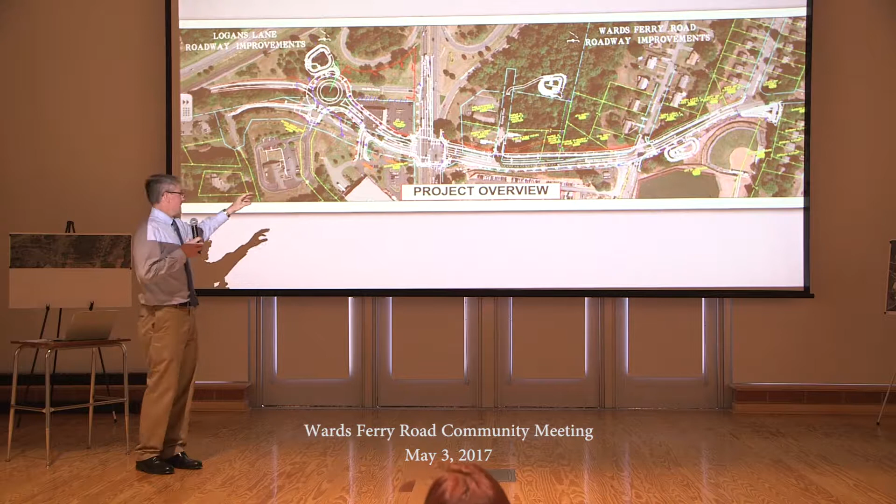Work will be going on both on the Wards Ferry Road side of Timberlake and the Logan's Lane ramp part of the project, basically at the same time throughout that 18 months, to make that as short a window as possible.

But coming off 501, the expressway, to get onto Timberlake, you will encounter this roundabout, the traffic circle, which I know there's been a lot of questions about, and we're happy to answer any questions about how traffic will flow. There's several of these in the city, and more people are getting accustomed to them, as well as there being a learning curve as traffic learns to navigate that circle.

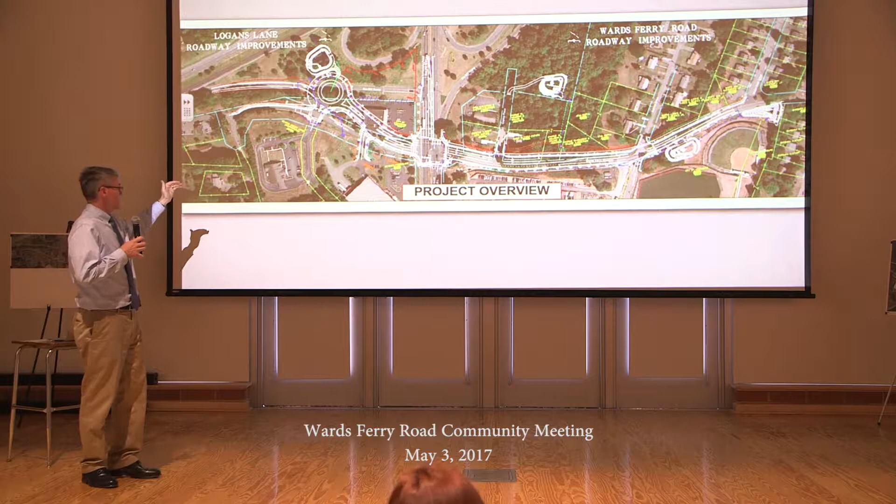You'll be exiting 501, going through the traffic circle to come up to the intersection. The main point of the project is to align that off-ramp in Logan's Lane with Wards Ferry Road. We'll be removing the existing light at the current off-ramp, so you'll have one fewer traffic signal in that corridor.

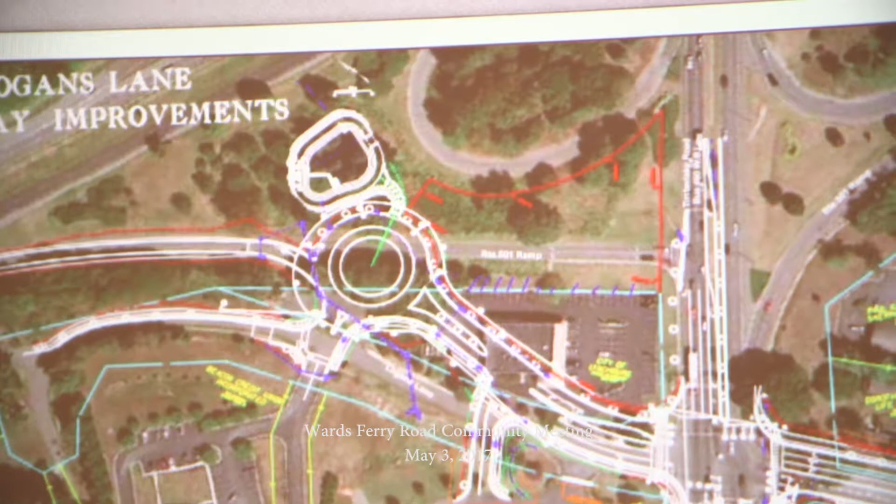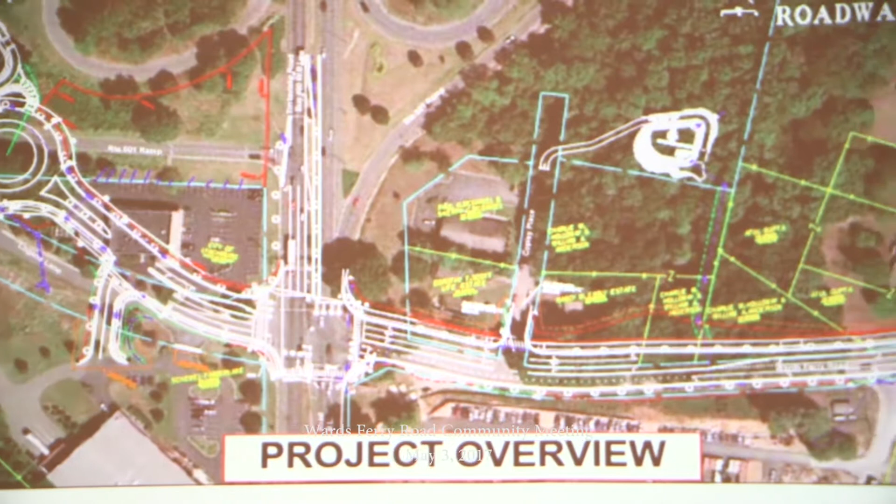Perhaps best of all, on Wards Ferry Road, there'll be dedicated through lanes and dedicated turn lanes, both right and left, into each of the side roads, whether you're talking about Adams or School Drive. The good news is you should never stop behind a turning vehicle again once the project's finished.

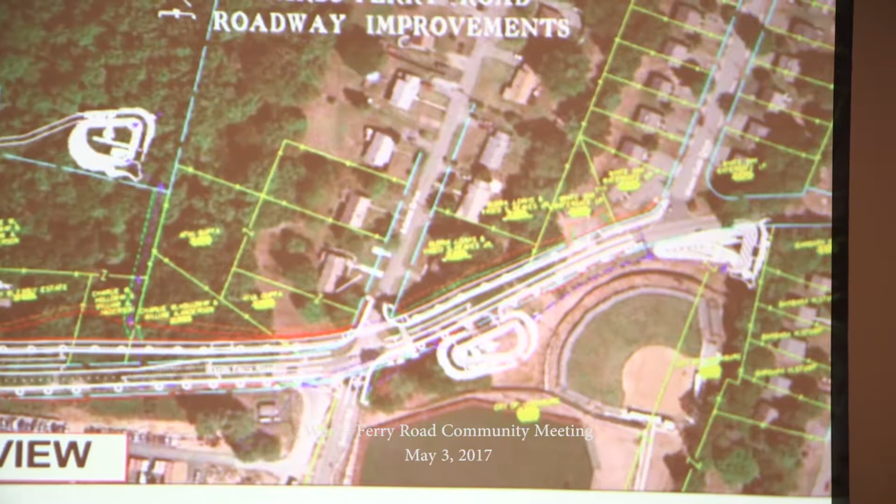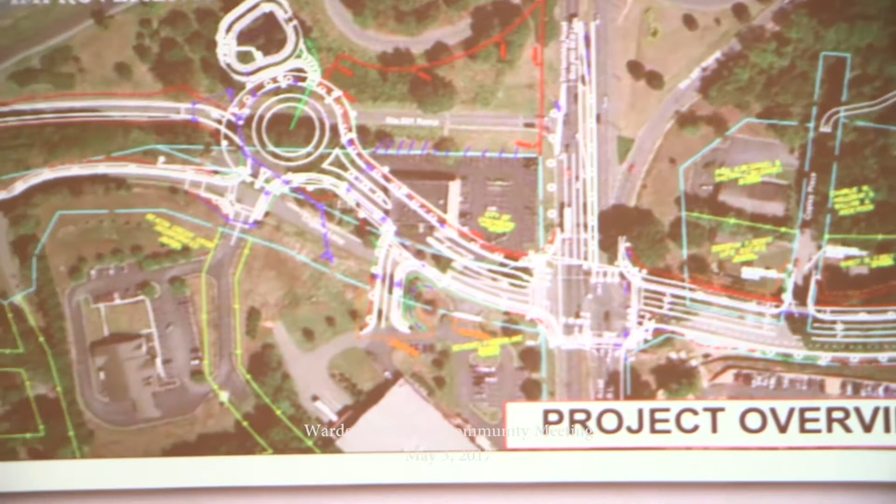With that, I want to turn it over to Brent to talk a little bit about how we're going to get there.

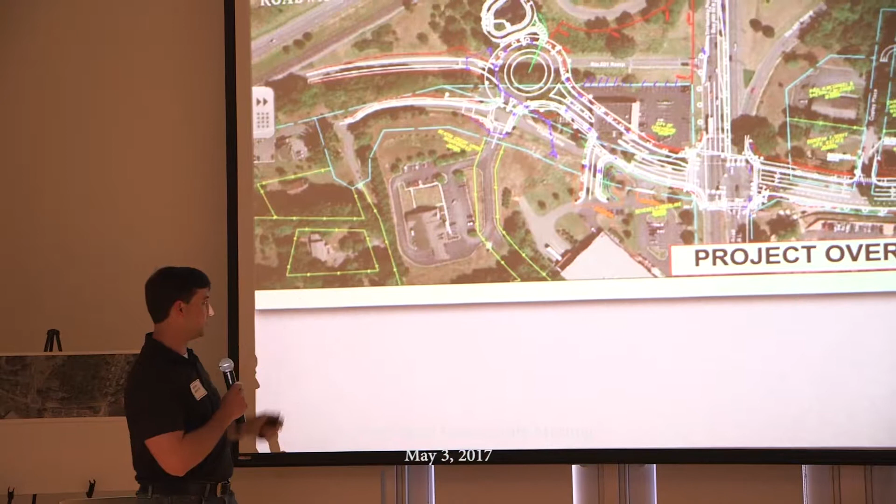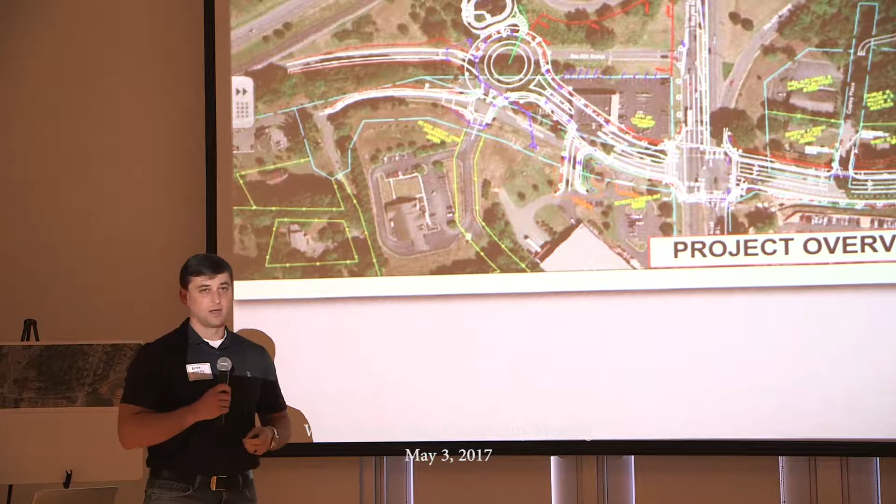Like Brian said, my name is Brent Worley, and I work with Counts and Dobyns, and I'll be the project manager on this job. I'd just like to repeat what Brian said: the whole purpose of this project, if you don't already know, is to construct a roundabout coming off of the ramp into Logan's Lane and intersecting at Timberlake, and then adding some additional lanes off of Wards Ferry Road. This whole thing is going to help alleviate all of the traffic congestion that we have in this area now. I'm not going to take up too much of your time, but we do have some slides prepared to go through the overview of the project and give you a feel of what kind of impacts you'll experience, along with the time frame and phasing.

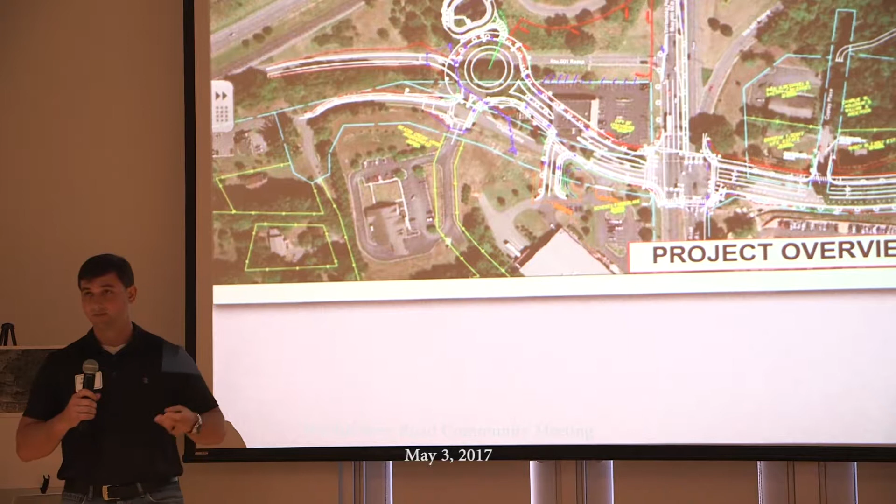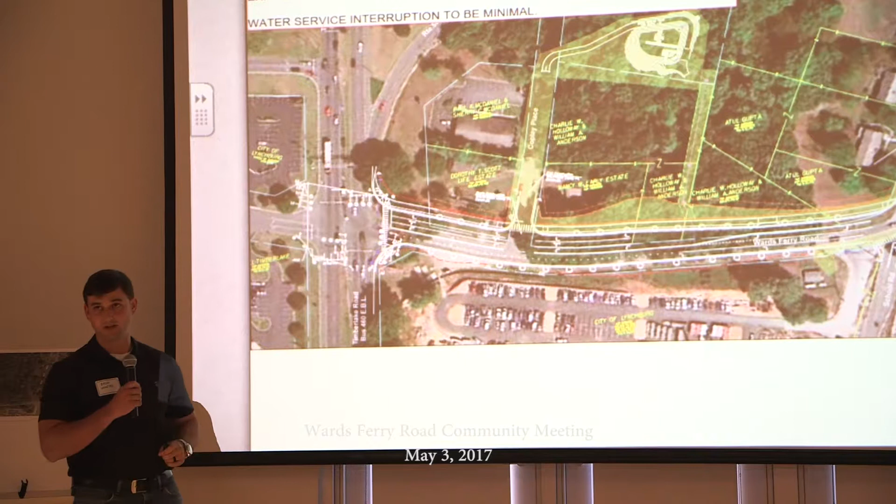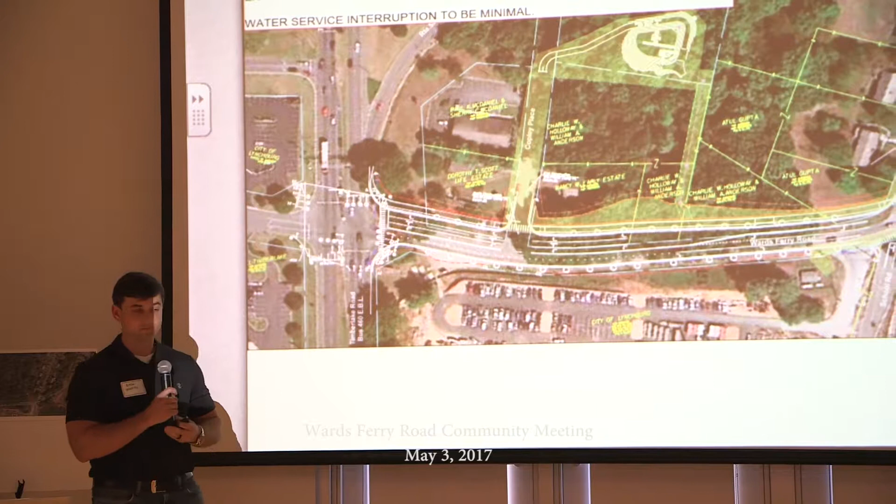The first thing I'd like to do is orient everyone to the slide. This is the Wards Ferry Road section of the project, and as we go through these, pay close attention to the highlighted portions in yellow, because these will be the affected work areas. For example, you'll see that there'll be some clearing along Wards Ferry Road.

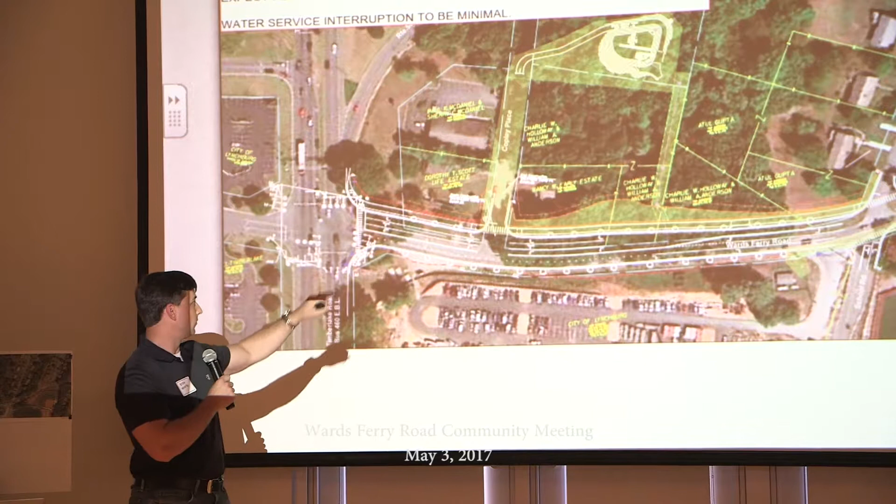Along with that, there'll be 3 sediment ponds that need to go in, 1 at the back of Copley and 2 at the ball fields, and then a water line installation at the base of this pond, all the way up to the entrance to Heritage High School. During this water line installation, you can expect to see flaggers and one-way traffic. This portion of the project will take place from the spring of 2017 to the summer of 2017.

Once we complete that, we'll move into the northbound section of Wards Ferry Road. The activities occurring in this section are demolition and rough grading, installation of storm drainage, curb and gutter, stone placement, and base asphalt mix.

As far as traffic impacts, expect a one-way lane of traffic with flaggers, basically from Watergate Drive down to somewhere right above Adams Drive. It's just a pinch point on the project, but we're going to try to maintain two-way traffic as much as we can. Two-way traffic benefits us just as much as the public, so we're going to do everything we can to maintain it.

This portion of the project is slated to start spring 2017 or summer 2017, and run to about the spring of 2018.

Once we complete that portion of Wards Ferry Road, we're going to do a traffic switch and then start constructing the southbound portion of the lane.

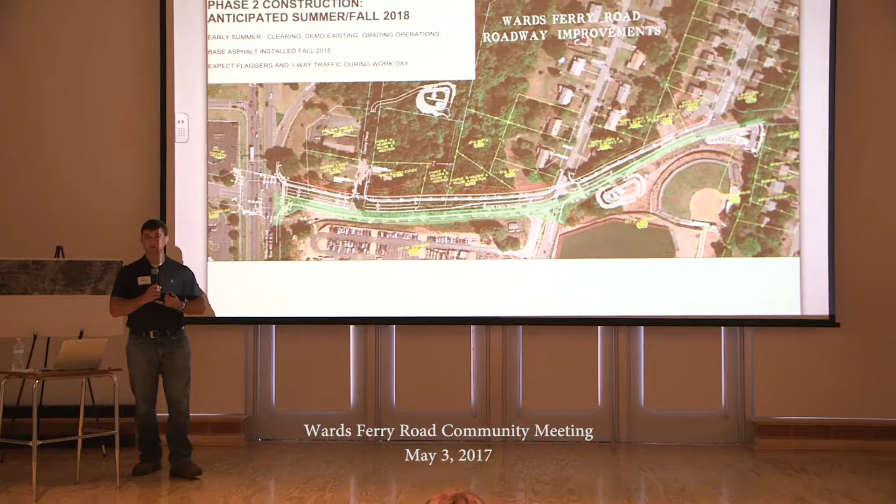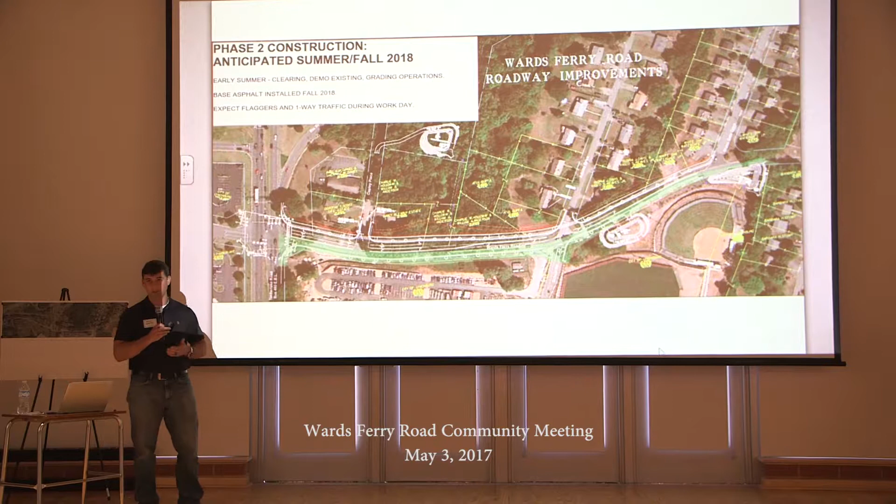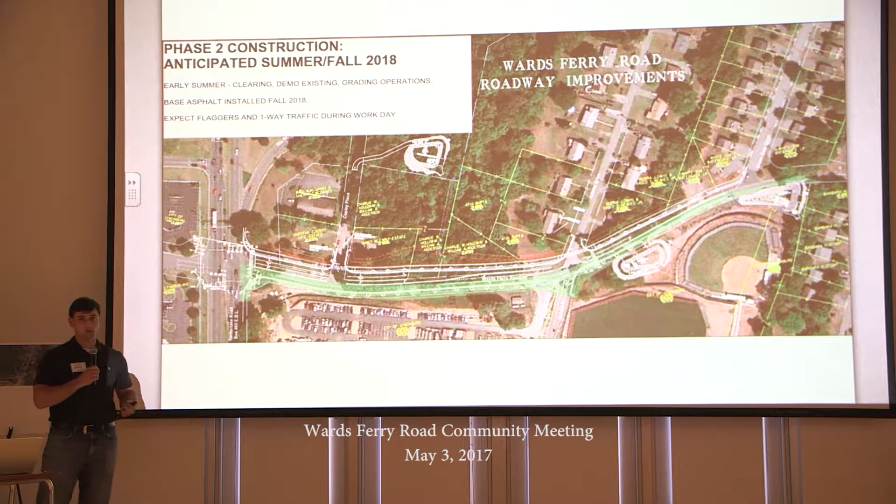Similar activities: demolition, rough grading, storm, curb and gutter, stone placement, base asphalt. As for traffic impacts, you'll see one lane of traffic with flaggers at this pinch point. It's not the whole phase, but there are portions of the phase that will be affected with one-way traffic. We'll maintain two-way traffic as much as we can as we're working, because it benefits us. This portion of the project is slated to start summer of 2018 and go to about fall of 2018.

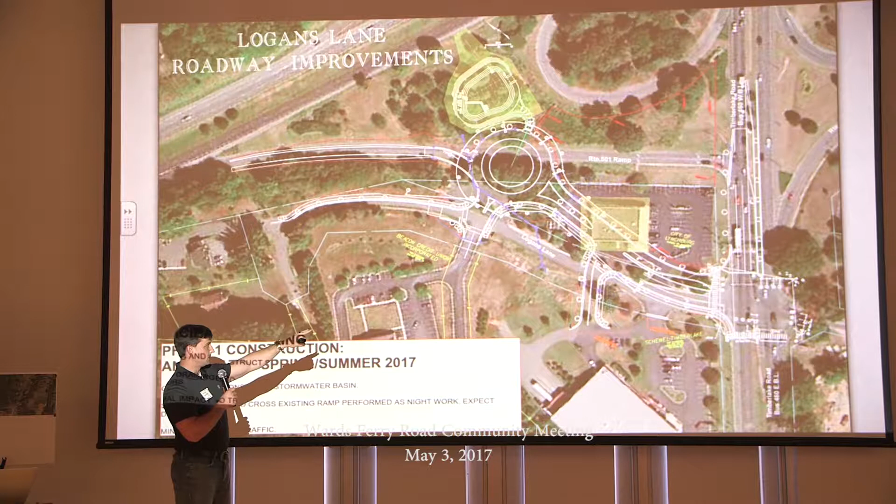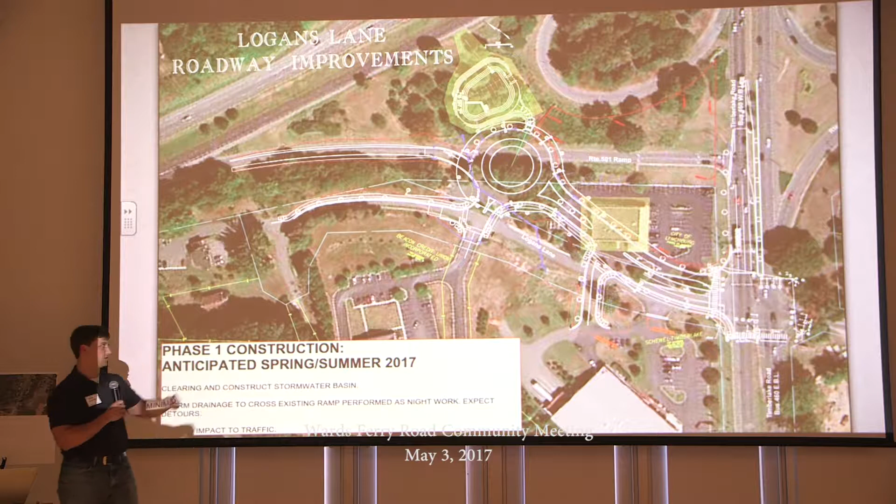Now we're looking at the Logan's Lane and the ramp side of the project. The portions in yellow here, you'll see the old restaurant that's going to be demolished, the clearing, and the installation of the sediment pond. We don't expect any traffic impact during these activities. This is slated to start very soon. In the next week or two, we'll demo that chop house and put in the pond shortly after that. Again, spring, summer 2017.

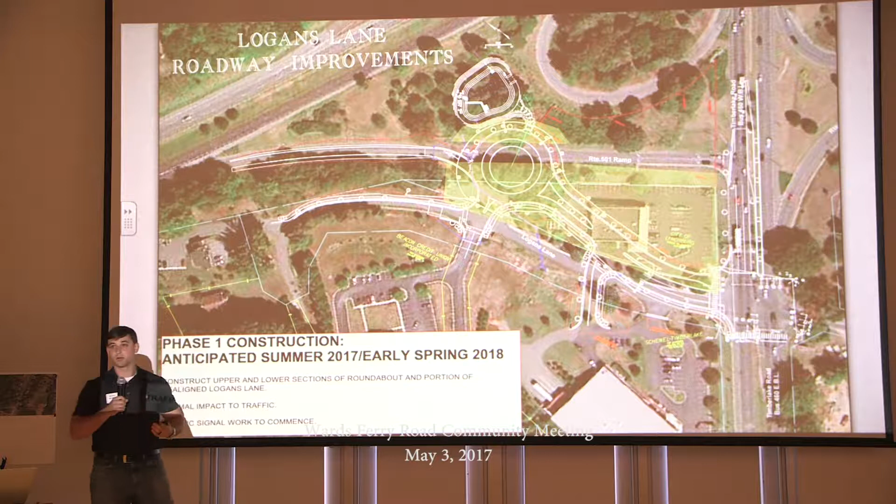You can see them there, the lines in blue. So we're going to try to do that work at night so that it doesn't impact traffic during the day, but we will have to shut it down and have it reopen back up first thing in the morning. This is slated to start summer of 2017 and finish around the early spring of 2018.

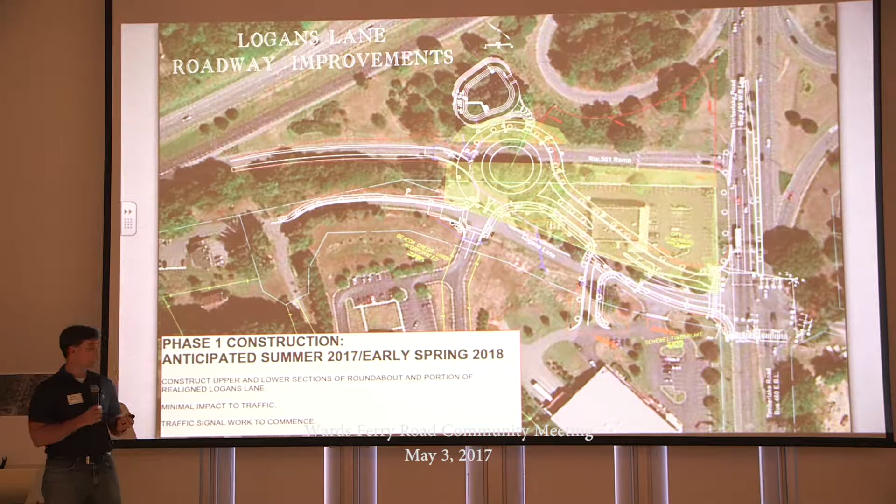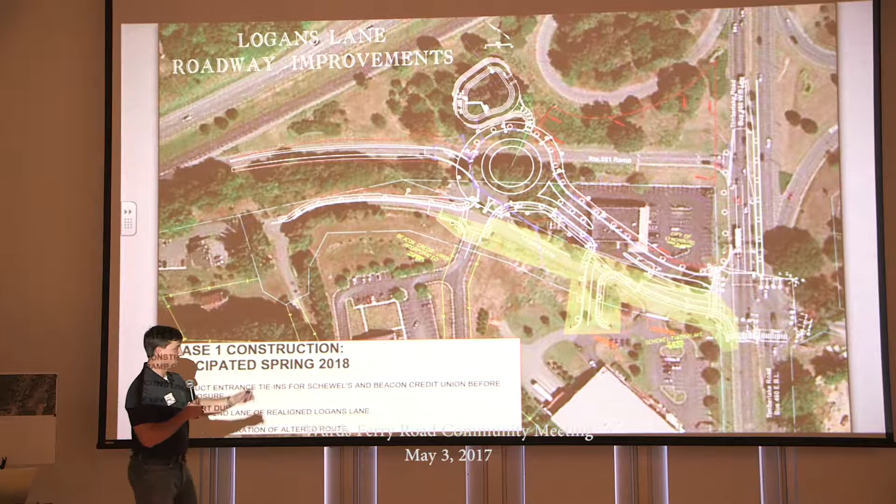After that's done, we'll move into what we're calling phase two - this is still phase one, but we'll move into the installation of the Schewel's entrance, the new entrance there, the tie-in at Timberlake Road, and then the intersection of Beacon Credit Union and the Logan's Lane intersection. During this phase of the project, you can expect flaggers and some one-way traffic during work hours, but after work hours, we're going right back to two-way traffic.

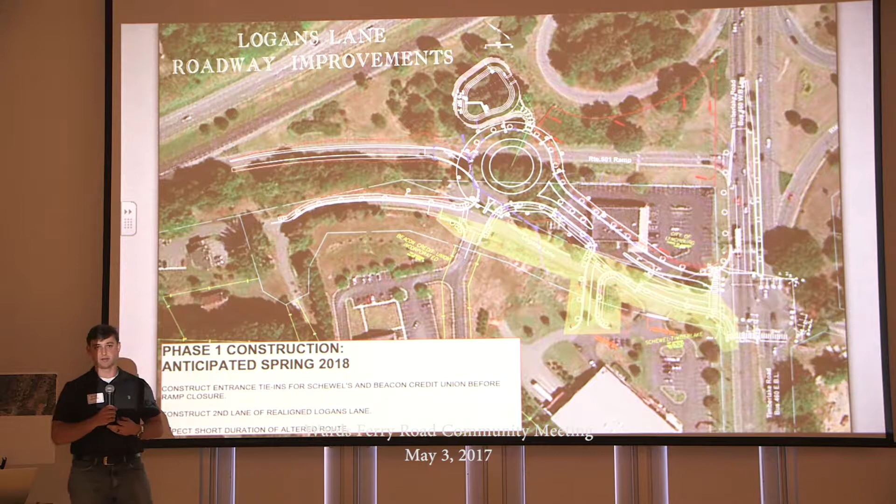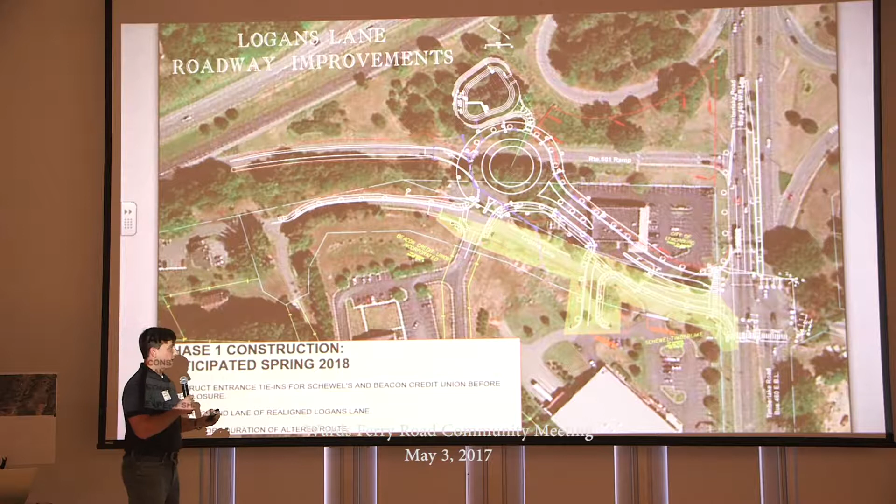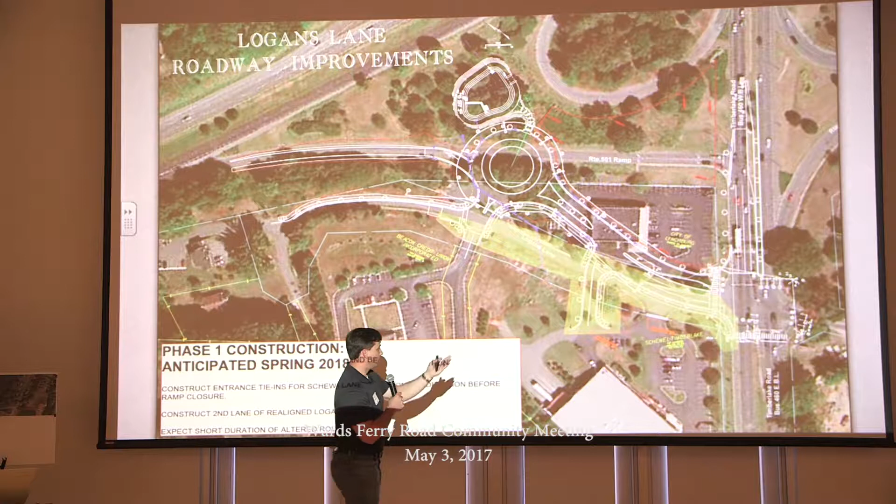We'll put it back as best we can with some stone, but there'll be just a little bit of one-way traffic here. Also, you can expect a short duration of an altered route. We'll have to reroute traffic up into a portion of the completed roundabout and out to Timberlake Road, and then back down to get access to these homes back here and Beacon Credit Union. This portion of the work is slated to go in the spring of 2018.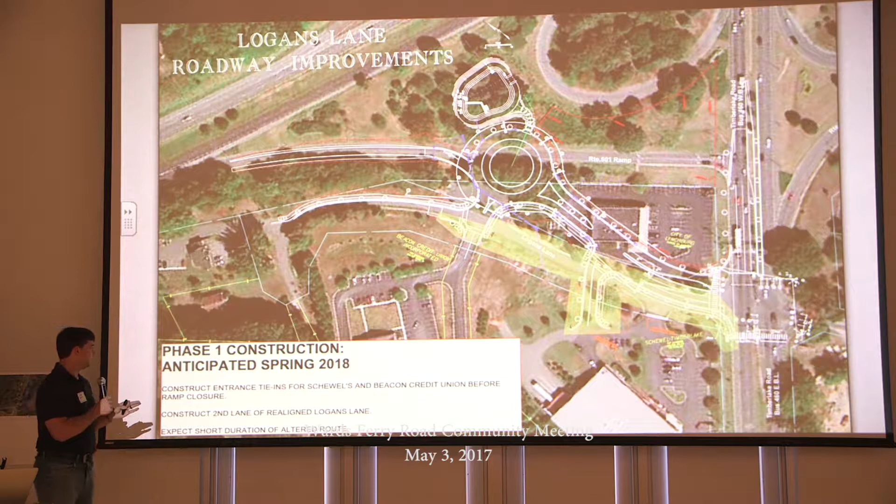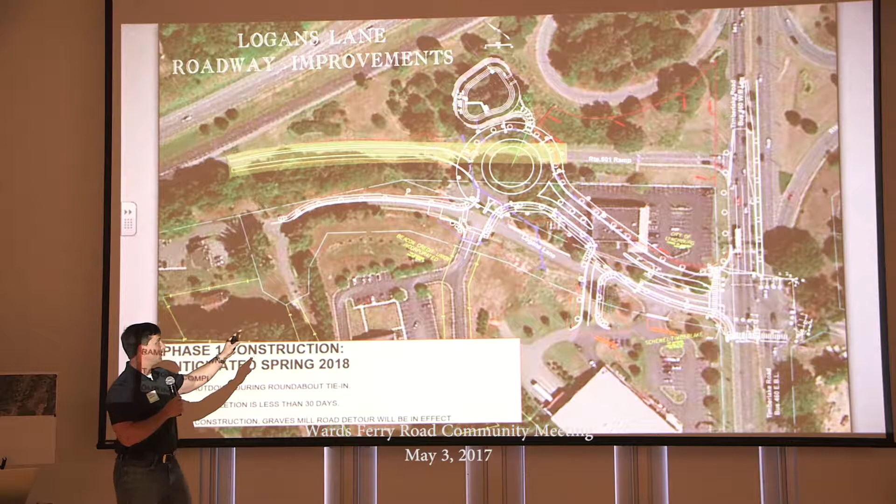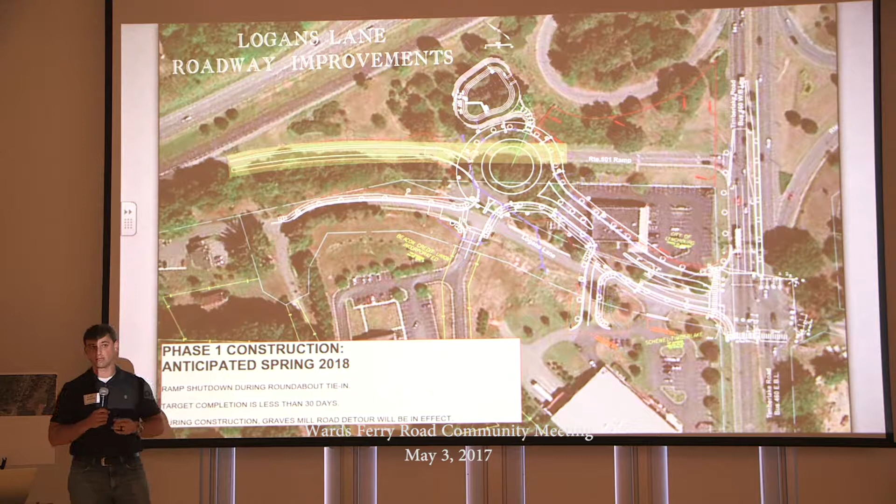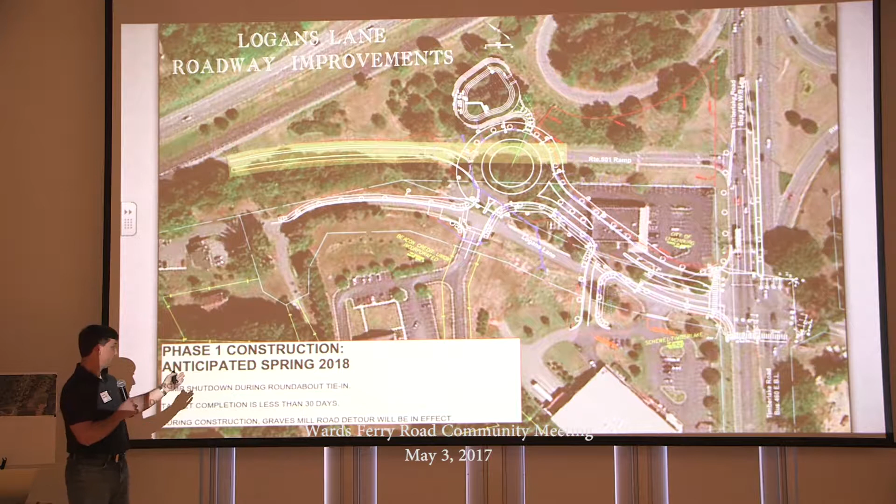Now, this slide is showing the tying together of the upper and lower portion of the roundabout. When this work happens, we'll have to shut the ramp down, tie this thing together, and get the ramp open back up. During this time, there'll be a detour, which you'll see on the next slide, but we're going to try to have this done in 30 days or less. That's the goal that we've set, and that's the goal that we're going to hit. This is slated to go in the spring of 2018 as well.

Here's a slide of the detour. As you can see, you'll have to take exit 10B, hit Graves Mill Road, run down, and then come out at Timberlake.

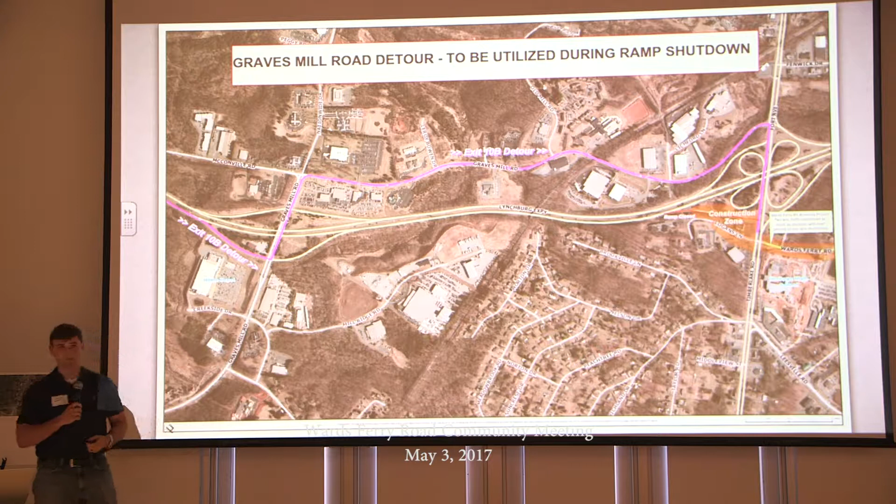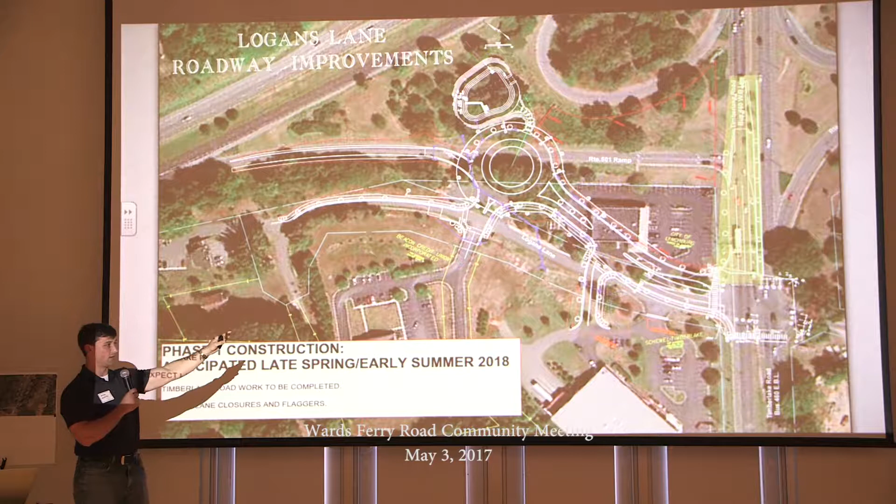After that ramp is opened back up and traffic is flowing through it, we're going to slide into Timberlake Road, construct that turn lane, that concrete median, and you can expect some lane closures and some flaggers when we do this. This work is slated to go in the late spring, early summer of 2018.

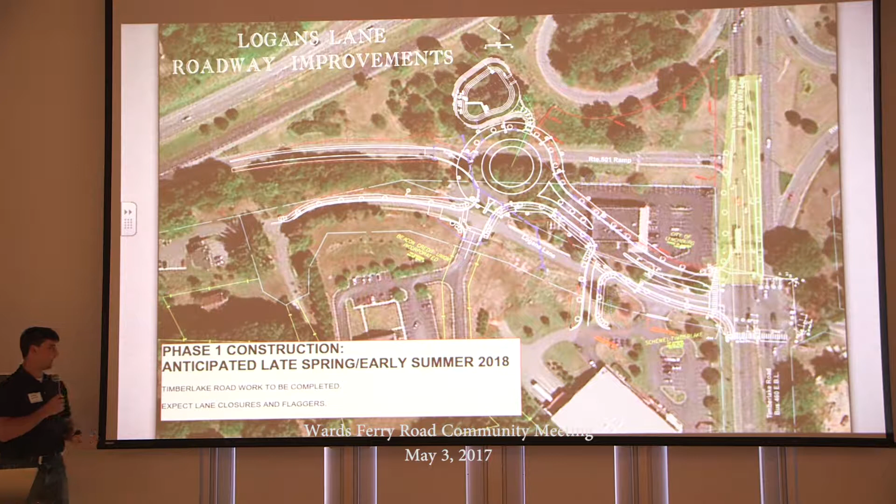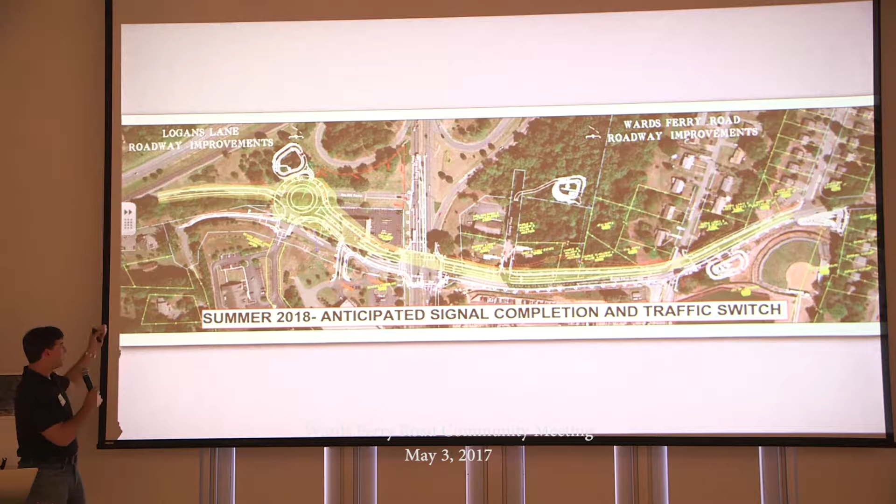This slide is showing the anticipated signal completion and traffic switch of both sides of the project, so Wards Ferry Road and Logan's Lane, and how it's all tying together at Timberlake.

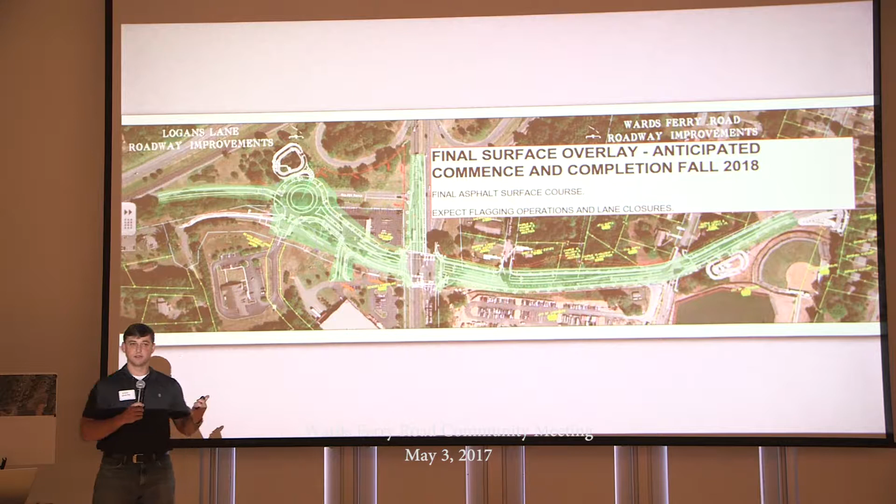This is a slide of the final surface and striping of the project. During this phase, you can expect some lane closures, some traffic switches, because we'll have to pave and stripe up one side, switch traffic, then pave and stripe up the other side. This is slated to go in the fall of 2018.

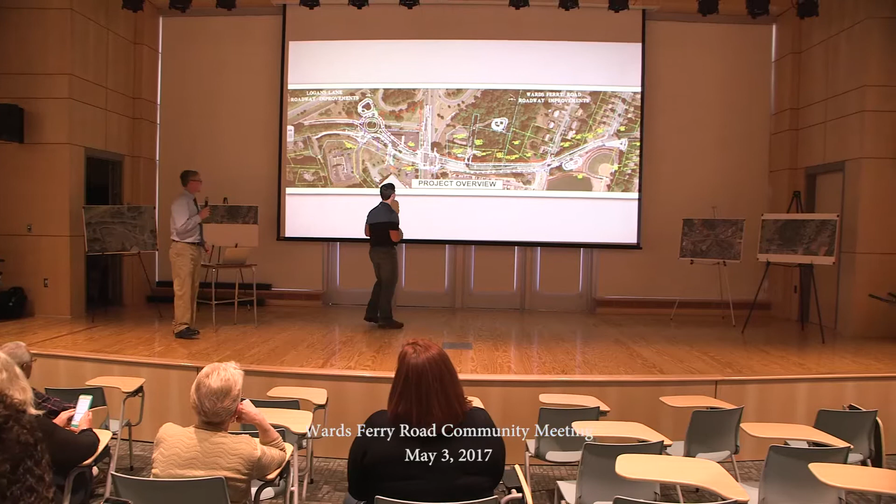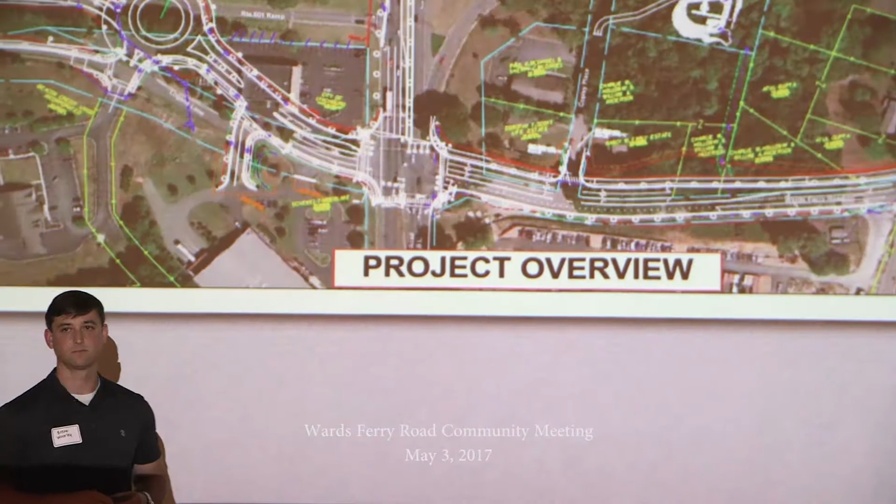The middle lane is a little hard to see, but there's three lanes there. The two left ones are both left turn lanes. The rightmost one is the one that goes through, a dedicated right turn lane. So there's two that go left and one to go through.

I had a question regarding the detour, where Old Ferry runs into Nationwide. There's a four-way stop intersection right now. Is there any consideration towards turning that into a roundabout for long-term improvements? This is Lee Newland, the city engineer. That is a future project on our books. There's no funding for it currently, but we are looking at turning the four-way stop into a roundabout. Thank you.

Can you go back to the diagram where Beacon Credit Union and Logan's Lane are shown, with the blue lines? You said that would be worked on in a night project. Exactly what do those lines consist of? Storm lines, just storm water, nothing like fiber optic. The utilities have almost completely been moved out of the way. Within the next 2-3 weeks we'll complete that, so they're completely clear. The great news is there will be no delay due to utilities on the project that we foresee now.

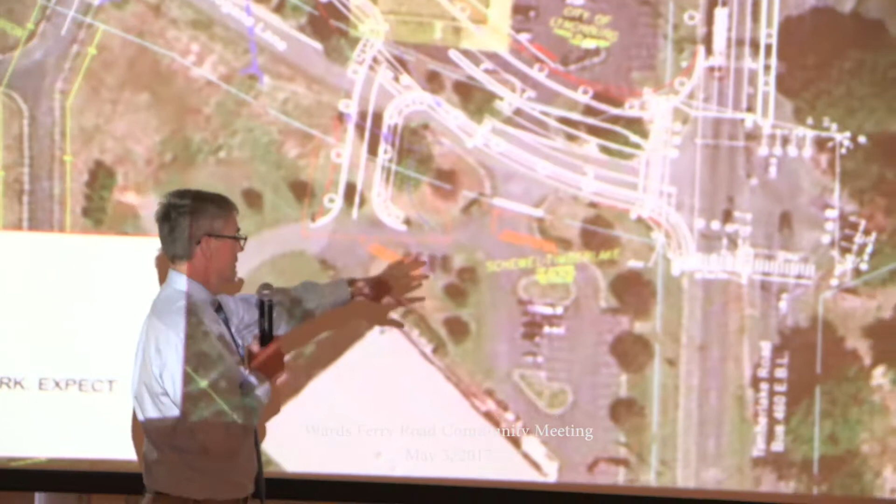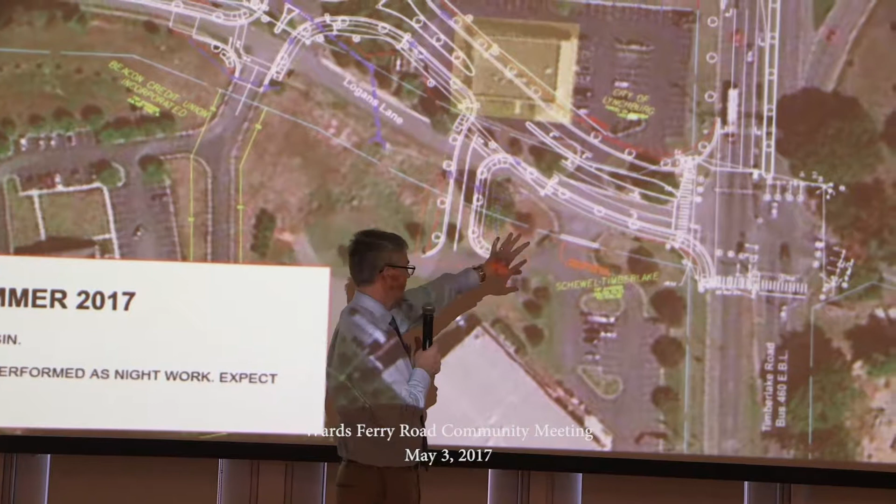So coming out of Logan's Lane, what are the lanes going to be? Left turn, straight, right turn? Your access to everything along Logan's Lane, Schewels, Beacon Credit Union, all the properties back there will all be through this new access point here at the signalized intersection.

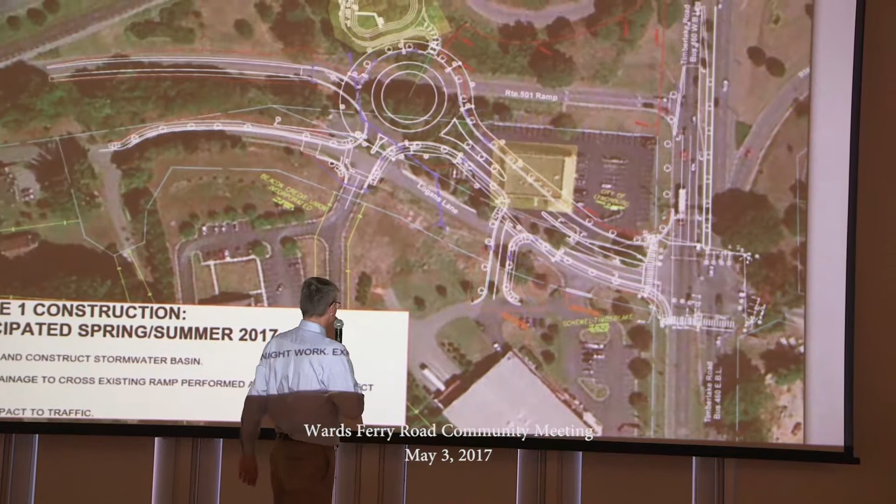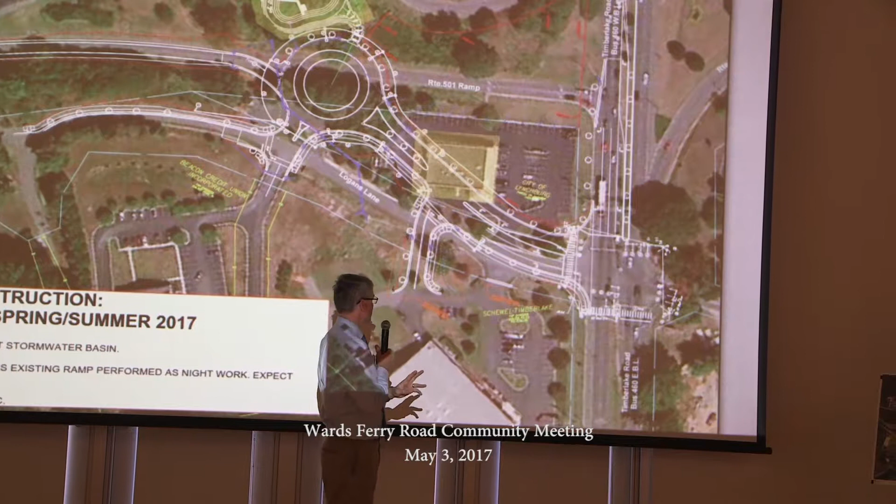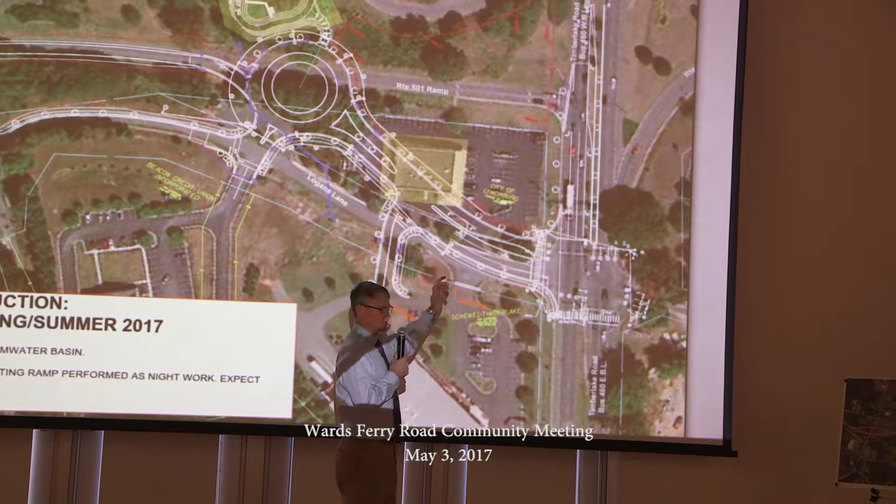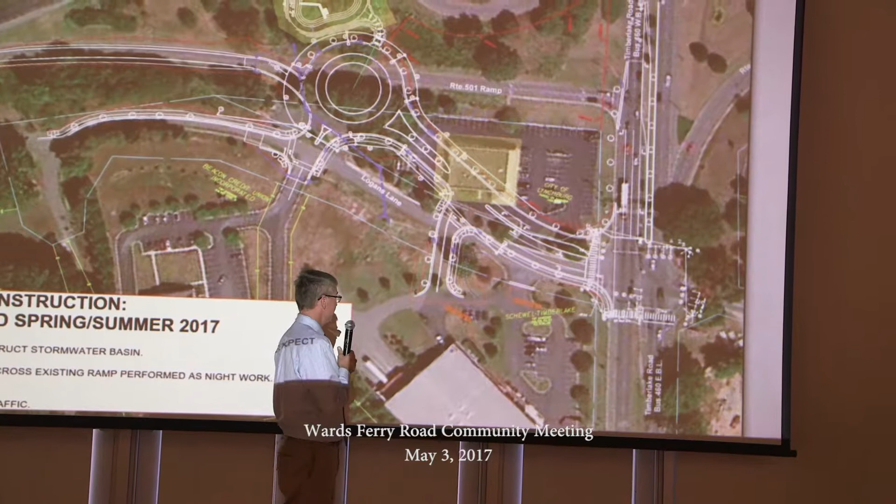So let's start if we're coming off the ramp or from any of the businesses or properties. You'll enter the traffic circle. There is just one lane there. As you approach the intersection, it will divide into three lanes: a dedicated through lane that goes straight on towards Ferry, a dedicated right turn lane, and a dual left turn and through lane towards Ferry. So your primary lane would be here if you're going through towards Wards Road, towards CVCC, coming out to Timberlake. On Logan's Lane, again, it's primarily just one lane there.

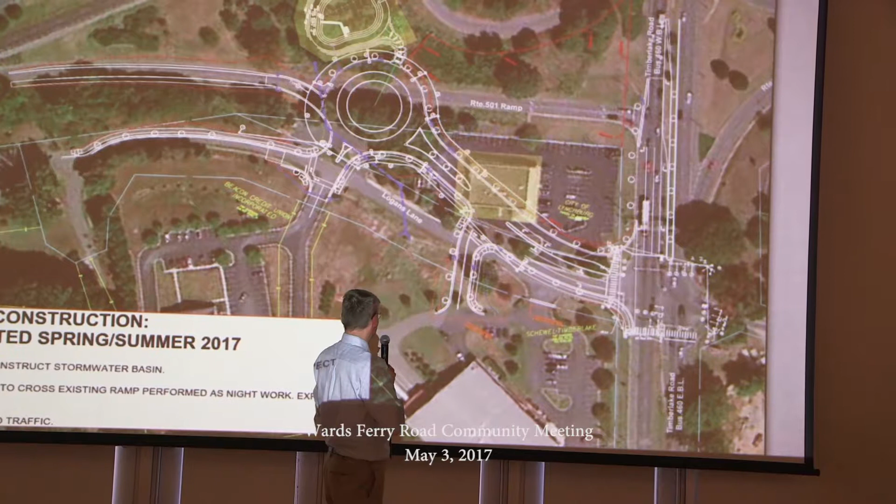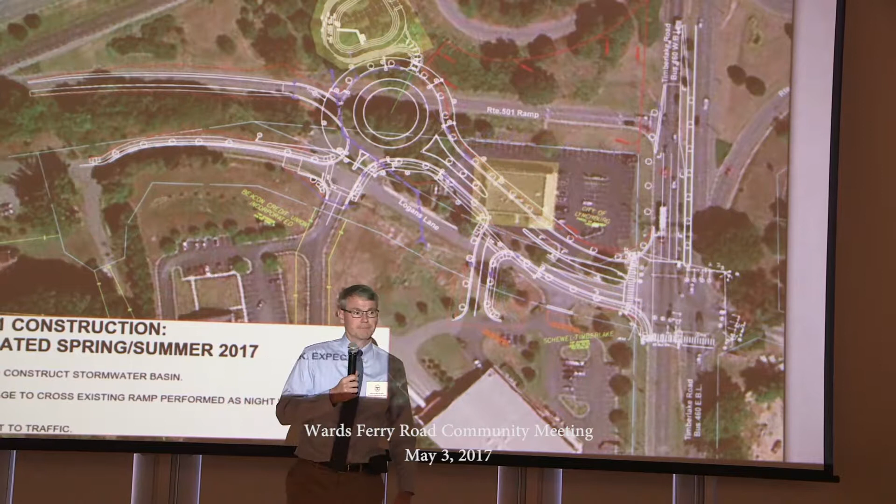You do have a dedicated left going into Schewels. If you're coming off Timberlake and your goal is to go to Beacon or to the properties, you'll actually be going through the traffic circle, around, and then into these outlets here. So if you're coming down Timberlake Road and want to keep going out of town, you have to come into that traffic circle and go all the way around.

There's going to be one right lane to keep me going straight through, correct? If you're on Timberlake, you'll just keep cruising down. Oh no, not at all. Timberlake will operate as it always has. The only difference you'll see is there'll be one less light, and the turn lane will be longer. That's the only change, really.

Yes, you're gonna change the lights up there so that when you come off of Logan's Lane, they have the light, and we're stopped over here on Wards Ferry, and then Wards Ferry gets the light to go, or is it gonna be like it is now, so that we can all run under that yellow light and get into the head-on traffic? Yeah, right.

So part of any new signal design is a complete analysis of the timings for each of those turns. As you can see, there's a number of different turn cycles, and some places where you had one turn lane, now you've got 2. So the timings will change, probably fairly dramatically from what they are now. That's something that gets installed, then analyzed and tweaked once it's in service.

So that is, as Brent mentioned, our anticipated date for that is about a year from now, probably May to perhaps early June of 2018. Probably wait till school gets out for wisdom there, and then that's definitely part of the process, to always see how traffic is handling those situations, and tweaks and improvements that the city will perform at that point. But there is a full analysis of that, which is part of what the signal contractor will be responsible for finishing.

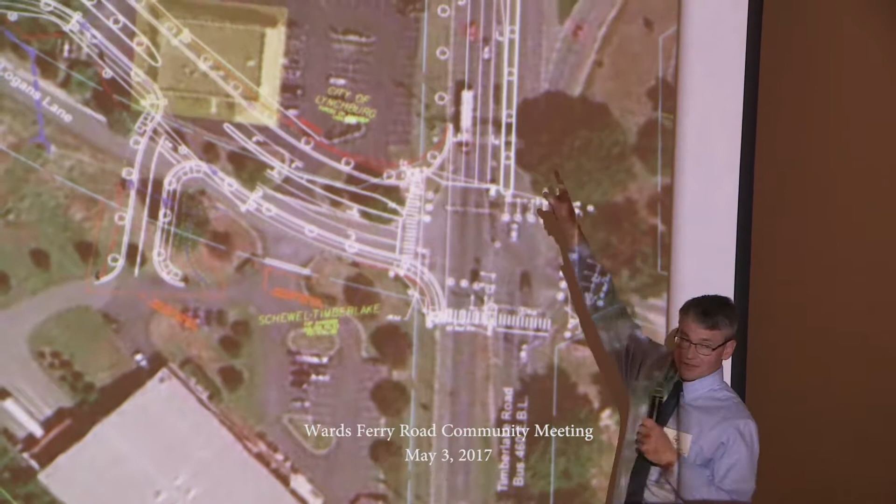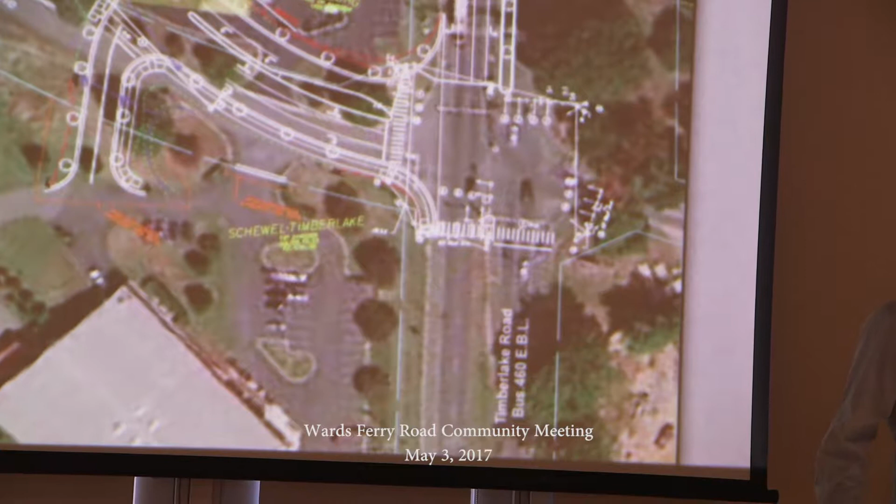Right, so the only signal will be right here. It'll be a 4-way signalized intersection. Exactly like it is now, right. With only one stoplight. Yes, absolutely.

Is it possible to have all the stoplights on Timberlake Road out to the end of the city limits all be synchronized, and then when they all turn red, then all the side streets feeding into Timberlake Road can have their green light?

I mean, you go 50 feet, they got another stop. Yeah, there's two sections of Timberlake Road that kind of function as separate sections. The first section starts at Long Meadows and Edgewood -- is that the name of it? Long Meadows at Post Office. So that one, the one at Fenwick, the one at the off-ramp further down at Old Graves Mill Road, and then this one and the one at Leesville kind of all work together.

They're all close enough, and we're in the process of doing it. This project fixes this signal. The one at Fenwick's already been done, and the one at Long Meadows has already been done. So there's the one at the ramp we've got to take care of, and the one at Leesville we've got to add equipment to get that to work as one.

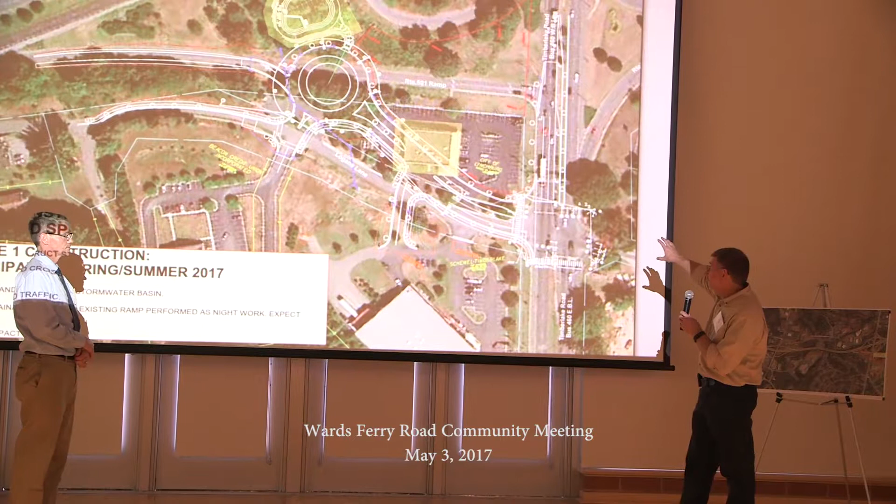I want to say one other thing - I've had a couple questions about the roundabout. You won't be going through the roundabout unless you are on Timberlake Road or Ward's Ferry and want to go to Schewels, Beacon Credit Union, or the apartments or houses behind it. The upper part of the roundabout is for traffic getting off of Timberlake Road to go around to get to those areas. If you're getting off of Timberlake Road on the ramp, you will go through a portion of the roundabout. If you're staying on Timberlake Road, you will not go through the roundabout at all.

It doesn't have anything to do with this project, but has anything been thought about doing anything with Ward's Ferry Road? It carries a lot of traffic. There was a corridor study done a couple of years ago, and there are spot improvements on Ward's Ferry Road trying to be put into the city's capital improvement program, but currently none of them have been funded other than right here at the beginning at the school. They have been looked at, they're just not funded currently.

Do you know your overlap on finishing Greenview and when this one starts? That's a good question - I do have some involvement in both projects. Greenview will be having a major traffic switch in the next month, which should further help that flow a little better, with some shifting onto portions of the new roadway. Greenview's current anticipated completion is fall of this year, with final completion maybe mid-fall. So there will be some overlap, and personally I wouldn't imagine the two would affect each other. Greenview actually flows better today than before construction started, and once traffic switches, I think it'll be even more so. But we'll have to see.